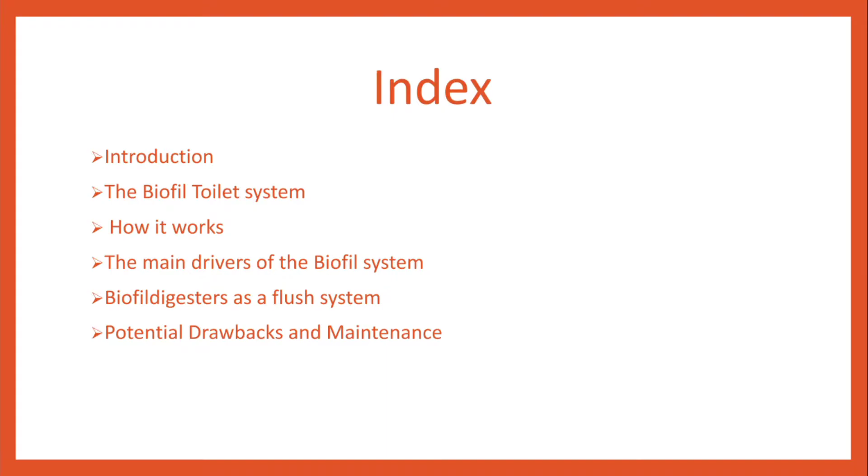Content of our project is introduction, the Biofil toilet system, how it works, the main drivers of the Biofil system, Biofil digester as a flush system, potential drawbacks and maintenance. Introduction. The composition of the gases produced by this type of biodigester is about 60% methane, 30% carbon dioxide and the rest is hydrogen sulfide. Choosing a right biogas digester is very important while constructing a biogas plant.

Introduction. The composition of the gases produced by this type of biodigester is about 60% methane, 30% carbon dioxide and the rest is hydrogen sulfide. Choosing a right biogas digester is very important while constructing a biogas plant.

From the standpoint of fluid dynamics and structural strength, an egg-shaped vessel is about the best possible solution. This type of construction, however, is comparatively expensive, therefore its use is usually restricted to large scale sewage treatment plants. The Chinese fixed dome designs are of similar shape but less expensive. The hemispherical CAMARTEC design is optimized in structural strength but does not make optimal use of excavation required.

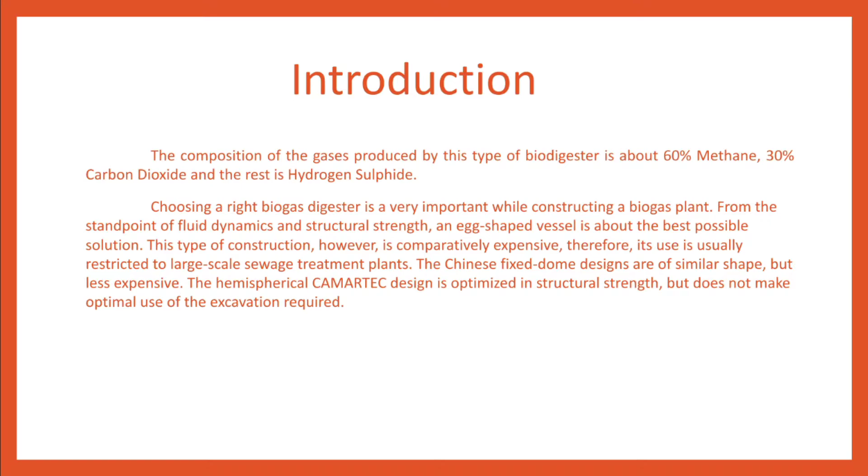Human waste disposal in innocuous form is an ever-growing problem leading to aesthetic nuisance, threat of organic pollution, and several infectious diseases in epidemic proportion due to contamination of groundwater and drinking water resources in highly populated and developing countries like India. Less than 30% of Indians have access to toilets. In rural areas, about 10% of houses have toilets and the rest of the people go to open defecation. Population in the cities, although they have better access to toilets, only to the tune of 70%. Untreated waste is responsible for several diseases.

Myself Apurva Munde and I am going to explain the topic of the Biofil toilet system. The toilet facility that made good sanitation sense. The biodigester is a simple, compact, on-site organic waste treatment system that uniquely combines the benefits of the flush toilet and those of the composting toilet and eliminates the disadvantages and drawbacks of both systems. Further images are examples of the Biofil toilet system.

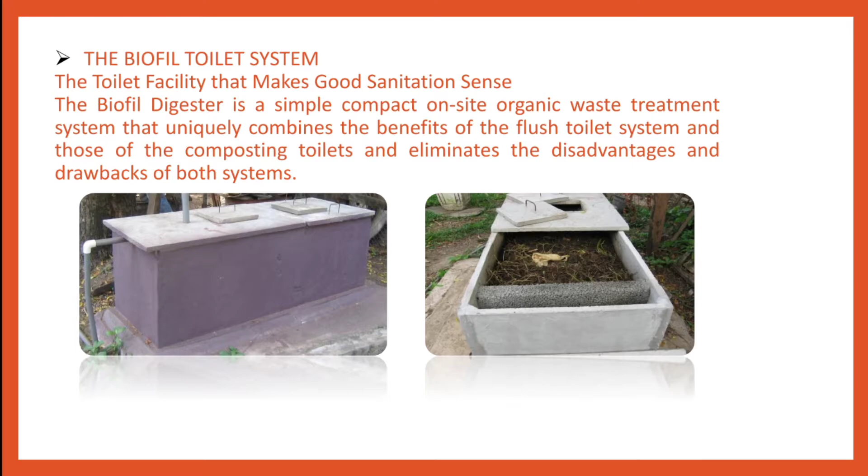How it works? The Biofil digester technology mimics the decomposition found under the forest floor and other natural environments. Living organisms, both microorganisms and macroorganisms such as the earthworm, in an enclosed environment, treat all organic degradable matter through the natural process of aerobic decomposition. Wastewater and fecal matter enter at the top of the Biofil digester where rapid separation of solid and liquid contents of the waste occurs. The digester is essentially a biological filter consisting of a medium of soil and pervious concrete.

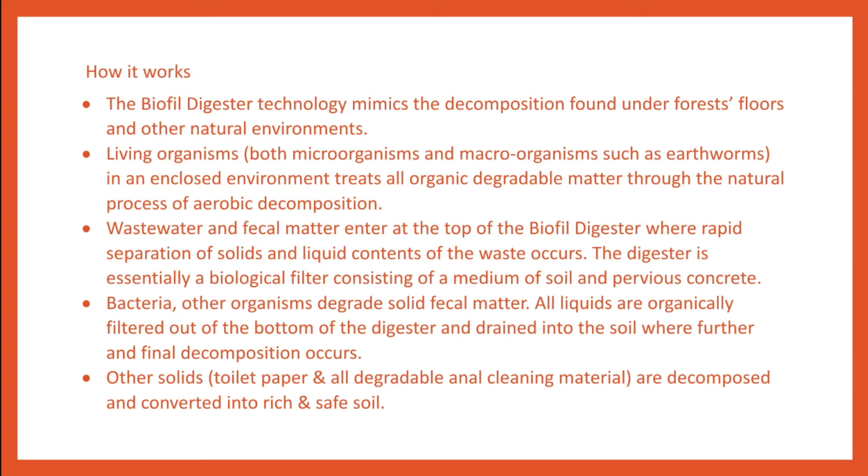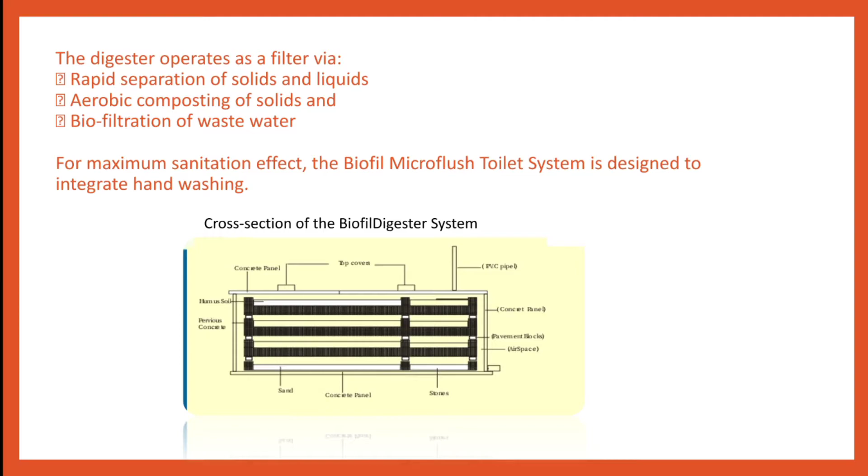The digester operates as a filter via first, rapid separation of solid and liquid, second, aerobic composting of solids and third, biofiltration of wastewater. For maximum sanitation effect, the Biofil microflush toilet system is designed to integrate hand washing. And further images of the cross section of the Biofil digester system.

I am Sahil Parab. I am going to explain the main drivers of the Biofil system. The first is good sanitation practice. Basically, the Biofil digester is completely aerobic. It requires minimum maintenance and needs no mechanical or electrical aeration of solid mass to achieve decomposition. There is no need for human contact with excreta, no odors or sludge generated in the system to attract insects that spread germs. Design considerations of the system make it impossible for rodents to burrow into the digester, unlike conventional pit latrines.

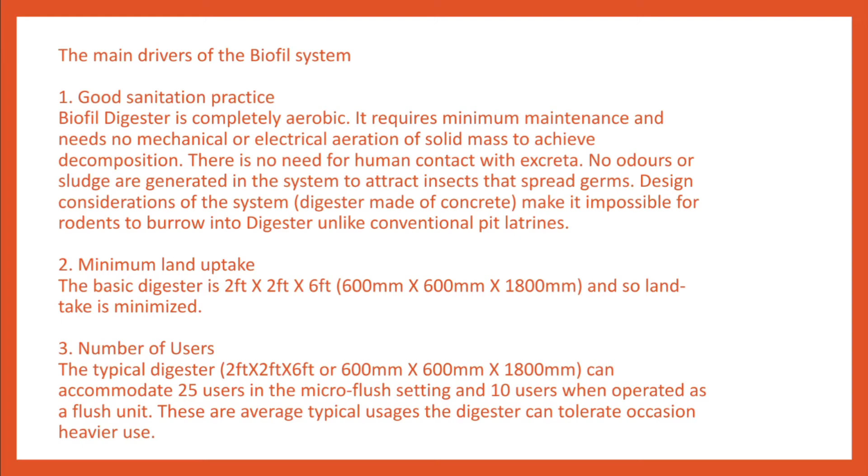Second one is minimum land take. The basic digester is 2 feet by 2 feet by 6 feet, means 600 mm by 600 mm by 1800 mm, and so land take is minimized. Third is number of users. The typical digester can accommodate 25 users in microflush setting and 10 users when operated as a flush unit. These are the average typical uses, as the digester can tolerate occasional heavier use.

Fourth one is environmental friendliness. Because the digester and effluent pipes are always installed above the groundwater table, water contamination is completely eliminated. The waste is treated under complete aerobic conditions, eliminating odor and air pollution. The system eliminates the possibility of costly site remediation and cleanup. Fifth one is potable water savings. Biofiltered water from the digester is ideal for landscaping in the case of flush toilets.

Sixth one is health impact mitigation. The hazards of unsafe sanitation include diseases like cholera, dysentery, scabies, and intestinal worms, and environmental pollution. Biofil toilets are well ventilated, well illuminated, and meet the specific needs of user groups. Misuse of toilets and open defecation is often avoided. Seventh one is ecological impact mitigation. The system eliminates ground or surface water and air contamination. It has a potential of reducing greenhouse gas emissions through the avoidance of methane emissions directly into the atmosphere.

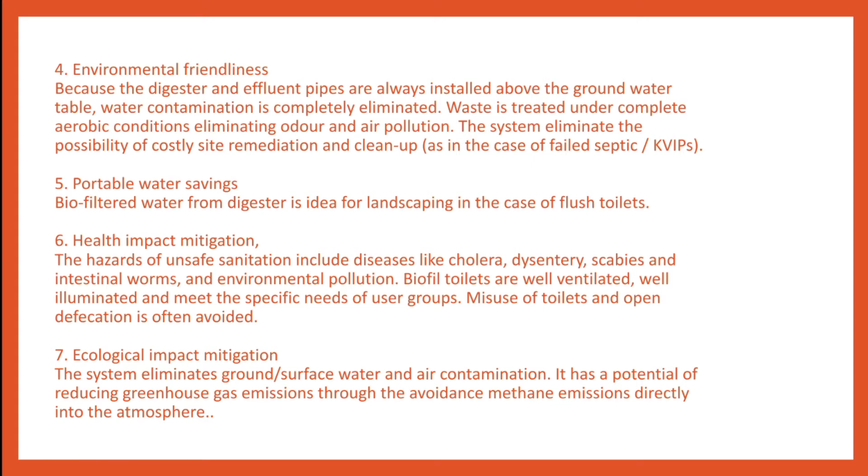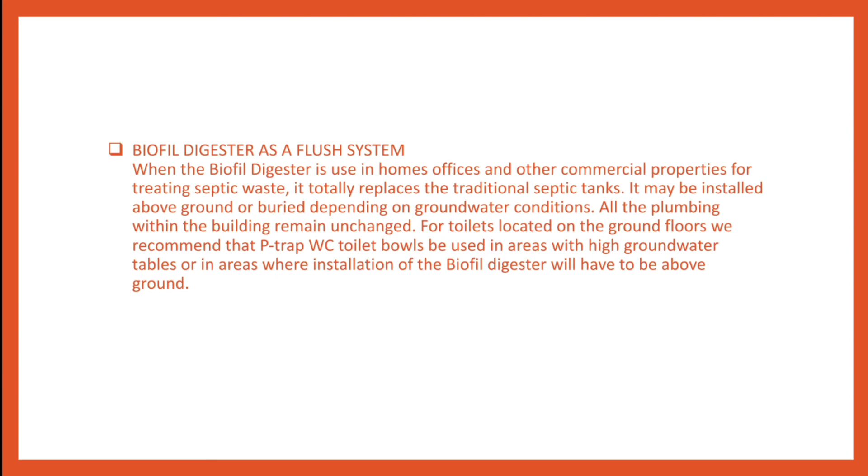Myself, Sahil Pawar. I am explaining the Biofil digester as a flush system. When the Biofil digester is used in homes, offices, and other commercial properties for treating septic waste, it totally replaces the traditional septic tanks. It may be installed above ground or below, depending on groundwater conditions. All the plumbing within the building remains unchanged. For toilets located on the ground floors, we recommend that P-trap WC toilet bowls be used in areas with high groundwater tables or in areas where installation of the Biofil digester has to be above ground.

Septic tanks require regular cleaning. Biofil digesters do not require regular cleaning. Septic tanks are not ideal for water-logged areas. Biofil digesters are suitable for all soil conditions.

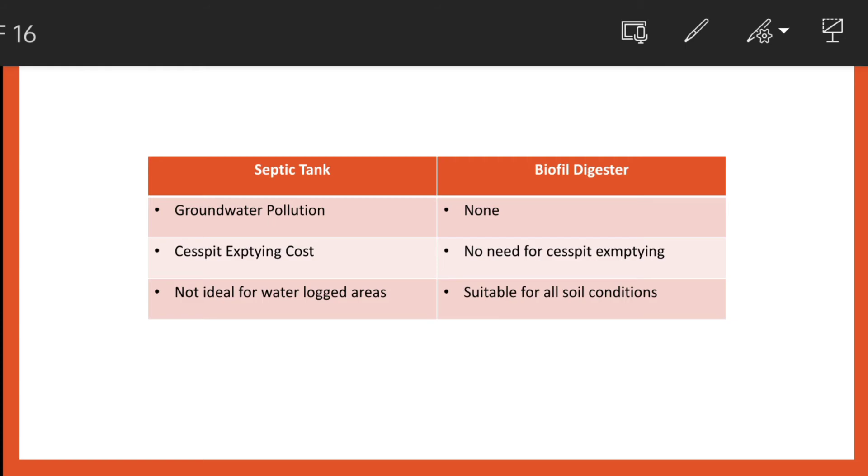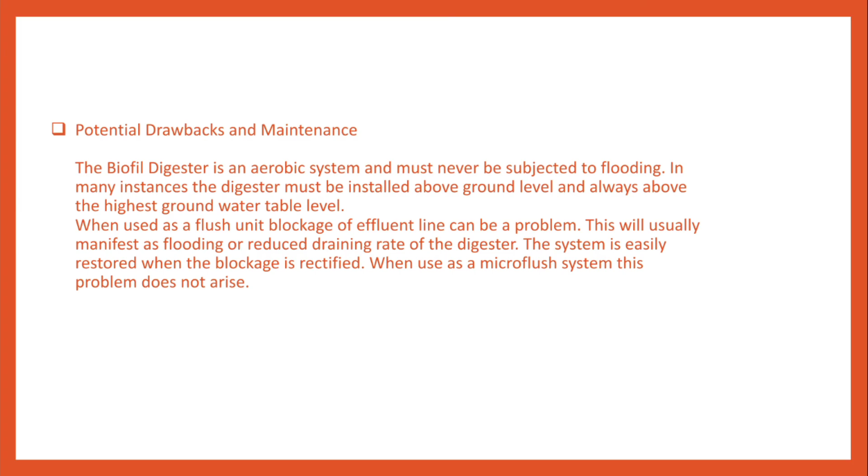Myself, Ankush Rathod. I would like to explain to you all about potential drawbacks and maintenance. The Biofil Digester is an aerobic system and must never be subjected to flooding. In many instances, the digester must be installed above ground level and always above the highest groundwater table level. When used as a flush unit, blockage of the effluent line can be a problem. This will usually manifest as flooding or reduced draining rate of the digester. The system is easily restored when the blockage is rectified. When used as a microflush system, this problem does not arise.

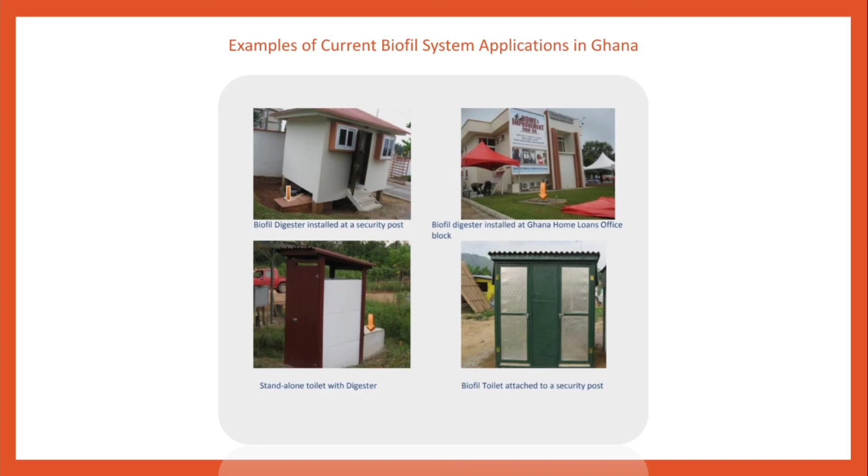These are live examples of current Biofil system application in Ghana, located in Africa. These images are a visual representation of our project. Thank you.